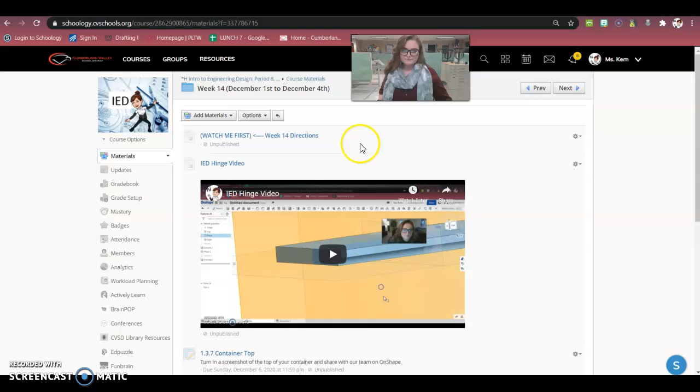I'm going to quickly go over what I'm going to have you guys working on this week. So, I know last week we talked about the loft tool, which is a great feature for you to use in Onshape, when you need to make those smooth connections between planes instead of those really jagged connections. So, loft tool is great. Hopefully you'll have the chance to use that. I think you will. And utilize it.

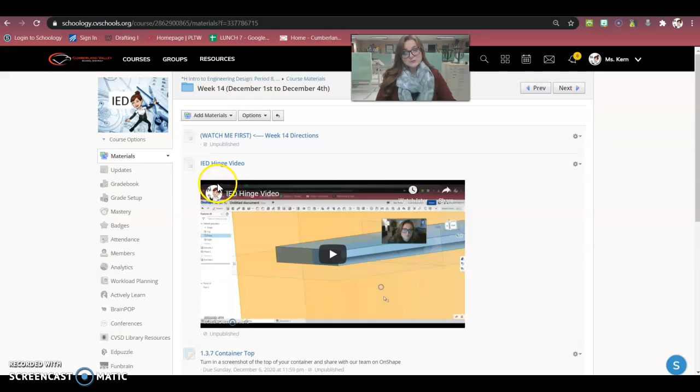But this week, we're going to get back into our protective case. Now, we did part one of the protective case design 2 weeks ago, which I had you filling out and rough sketching some ideas. Now, for this week, what I'm going to have you do is focus on completing the top and bottom of that container and turning those in. So I'm not going to have you do part two paperwork yet. I'm going to save the paperwork until next week because I don't need you worrying about getting all three things done in 1 week. But I'm going to have you create the top and bottom.

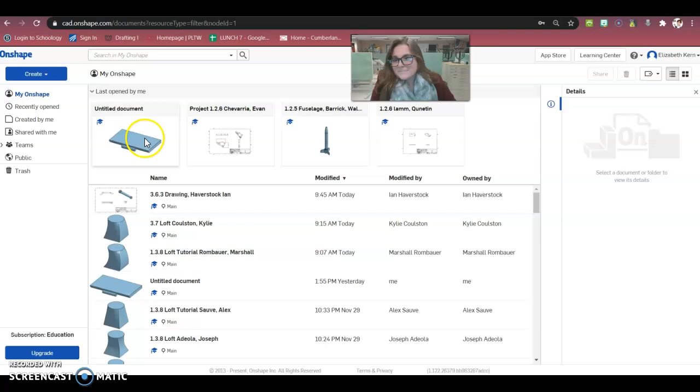And you're going to create the top and bottom in Onshape in the same file. It's just going to be different tabs is like how I like to describe it. So let me sign in and show you what I mean. I have a video on here going over that, and it'll show you in the video, but I also wanted to show you in this video because I think more people are going to watch this, hopefully you watch both, but I wanted to go over what I meant by that, especially for the people that might miss something or miss a class.

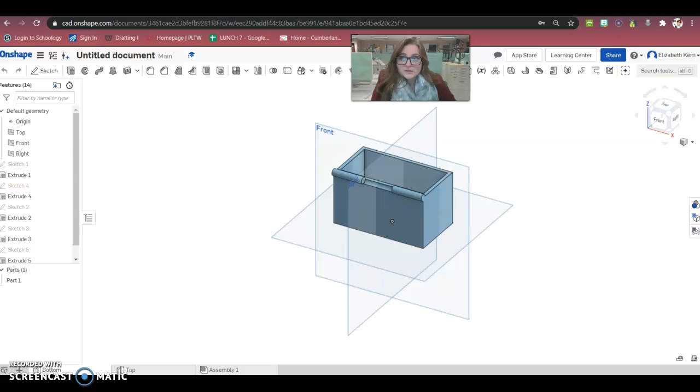So here's what I'm talking about. Top and bottom, same document, two different tabs. And to do that, you just enter into a document and you'll hit plus, create part, and that gives you two different parts in the same drawing. So that's what you'll do. That'll make assembling our top and bottom parts of the container so much easier. So for this week, I'm going to have you draw the top and the bottom of your container in Onshape, and you're going to submit screenshots of those drawings in Schoology, and then also share with our team.

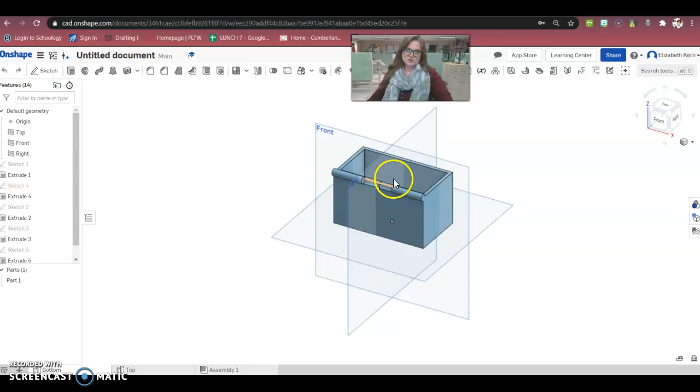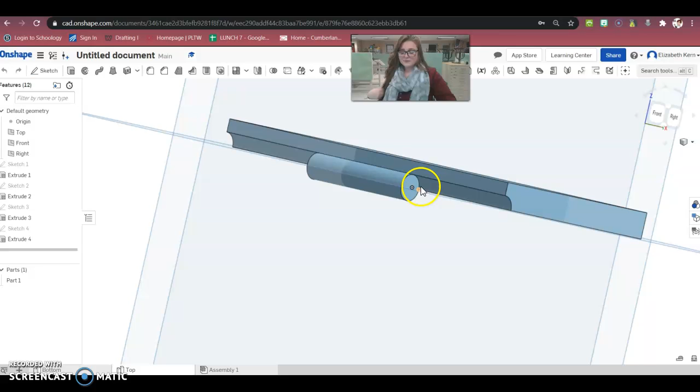And this video goes over how to create that kind of hinge effect, how to get this hinge. So I want everybody to watch that video because for some people, you're just going to stop here and that's all the further you're going to go with your hinge. But for some other people, you are going to go a little bit further, and I have not gone over how to do that. For the people that have been really doing well with Onshape, you're going to be making this hinge a little bit more detailed. For those that have struggled a little bit more, I'm going to have you stop here, and I can easily tell who does well and who doesn't based on your previous assignments. So don't be lazy. But those are the two things I have for you this week.

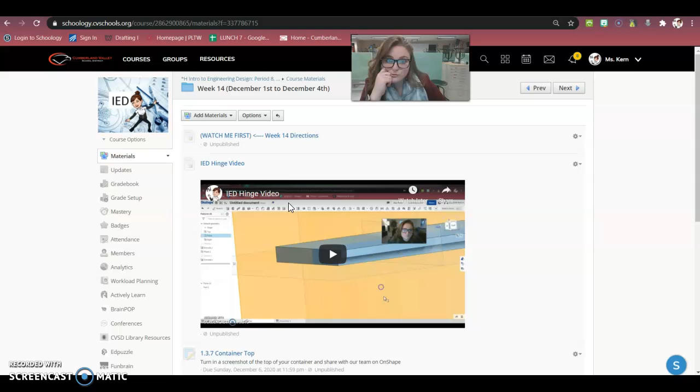Next week, you're going to finish the documentation and we're going to create a multi-view drawing that will include a section view. And it will be dimensioned and you will turn that in with the part two assignment for the protective case. So this week, just focus on getting the top and bottom of your container completed. And I want to see you guys working hard on this. I want to see more than just rectangular shapes. I want to see that you've put some decent effort in. I don't want to see just a 20-minute drawing when you had all week to make something awesome. All right, that's why I'm giving you extra time to do it. Do not abuse this niceness I'm giving you. Please use the time wisely, okay?